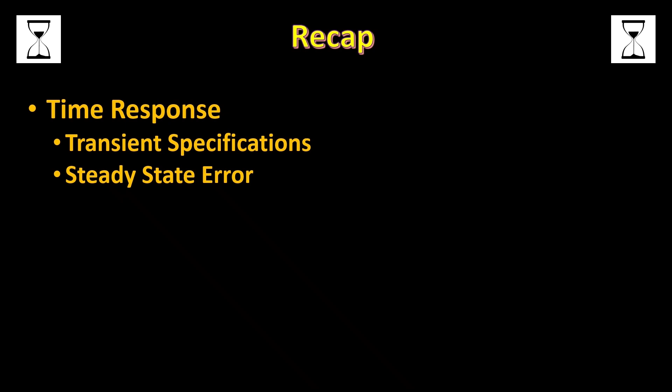I divide my PID controller lectures into three major parts. In part 1 and 2, I will cover the theory of the PID controller, whereas in part 3, I will solve some problems related to PID controller. Please recall, we have already studied time response analysis, so we know how to calculate transient specifications like maximum overshoot, settling time, rise time, etc. And we know how to calculate steady state error and what is the meaning of steady state error. So with this note, we will start.

So consider this figure first. I believe it is very much familiar to you. It is the block diagram of a closed loop control system where R(s) and C(s) are input and output signal in Laplace domain respectively. E(s) is denoting the error signal. It is obvious that the output C(s) depends on system and input R(s), right?

Now, in general, in industry, we cannot alter the system. That means G(s) and H(s) are fixed. So if we always try to bombard this system with the same input R(s), we will always get the same output C(s), right? But what if my output is not desirable? That means user wants something else. Okay, so is there any way to change our output or modify our output without changing the R(s) and the system? The answer is probably no.

But we can do a thing. We can employ a third party, or we can employ a system called controller, which basically we will try to put inside this system so that by using that controller we can change the output of the system. So our basic objective is to automate the control system. That means maintaining the output within desirable limits by selecting that particular control action. Now control action means that third party device, we need to fine tune it to get the desirable output.

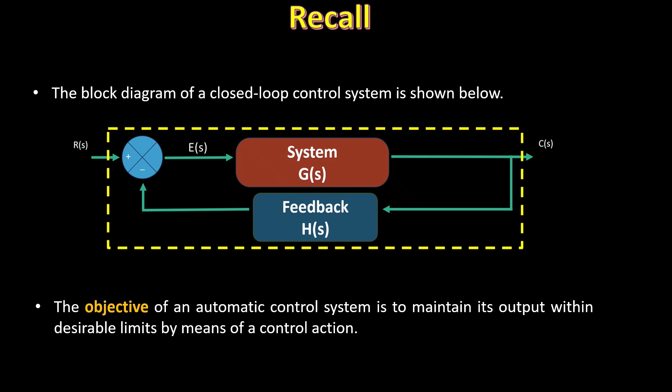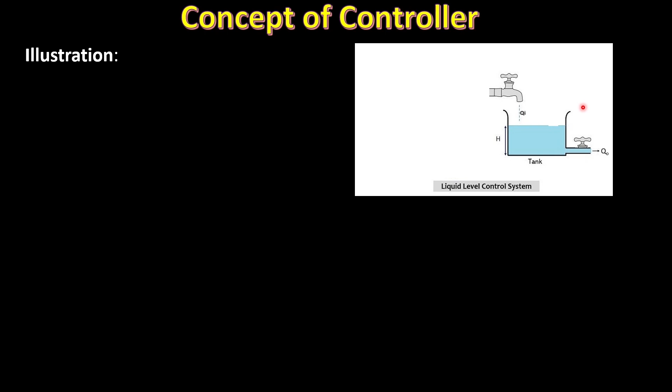Now try to grab the concept of controller using this simple illustration. This is a liquid level control system example. So here our objective is to maintain the water level at a particular height h. Now for that we have a tank and there are two taps. Tap number 1 is called inlet tap and tap number 2, let's say outlet tap. Okay. Now using these two taps we need to control the water level. So to make it automatic instead of manual, we must employ a closed loop like this one.

So here we first use a sensor, basically maybe an ultrasonic level sensor, and this ultrasonic level sensor detects the present water level and it sends this signal to a comparator, and the comparator then compares these two signals. One is the reference signal, that means the desired signal, with the actual signal, and then produces an error signal if any error is present. If there is no error present, that means the actual water level is at the reference level, then nothing to do. Controller will say, okay, keep idle.

Otherwise, if there is some error, either positive or negative, positive in the sense if the water level goes below the reference level, then you can term this as positive error, or if the water level is above the reference level, then you can say that it is a negative error. Okay, so once you get the positive error, controller will tell that, okay, I am getting positive error, so please turn on tap 1, so that water goes into the tank, and gradually the water level will reach the desired reference level, right?

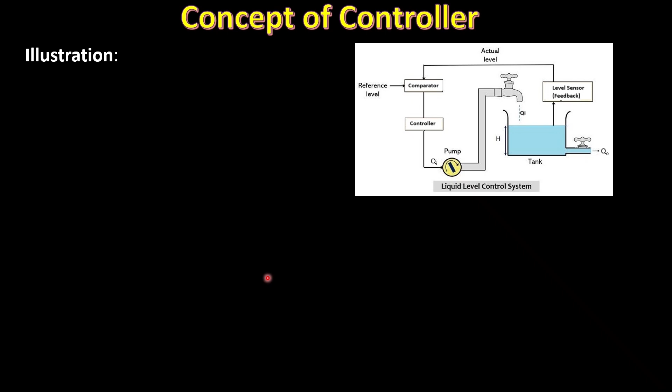And vice versa, if there is overflow, the tank is overflowing, so the controller will say, I am receiving negative error over here, so please switch on the outlet tap and switch off the pump. Okay, so in this way the water level system actually works. So our basic objective here is to minimize the error by employing an automatic controller.

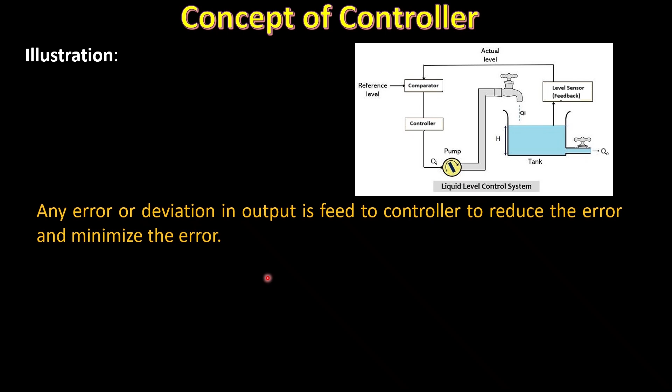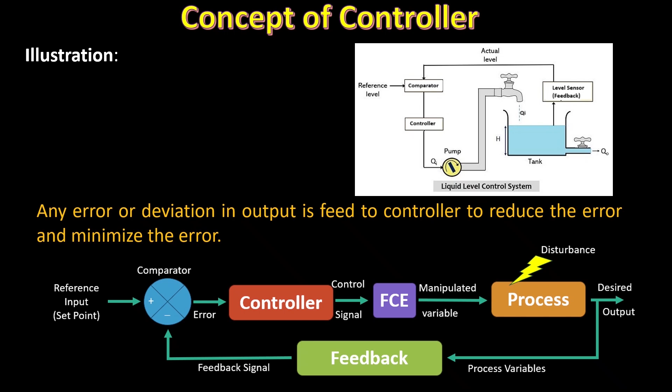Now, there are different controllers available in the market. The major controllers are on-off controller, PID, fuzzy, adaptive, robust, and model predictive controllers. This is not an exhaustive list, of course, but these are the major controllers available. Now, in your syllabus, we will talk about only on-off controller and PID controllers.

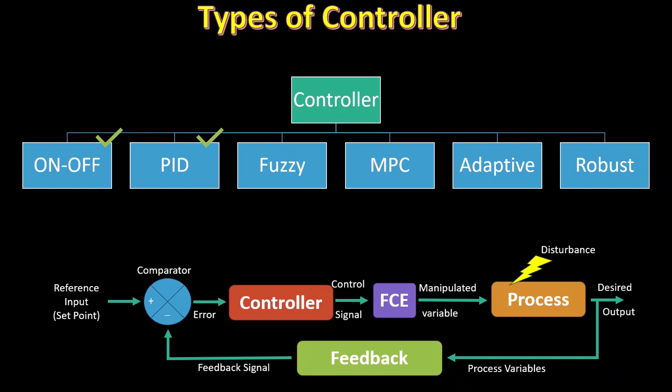Okay, so for understanding the on-off controller, again consider the previous example of the liquid level control system. Here you must know that there is one constraint. The constraint is that tap 1 and tap 2 operate in either 100% on or 100% off mode. That means there are no in-between points; it is not possible to turn on tap 1 by 50% or by 25%. Either the tap is fully open or it is fully closed. So this kind of control action is called on-off control.

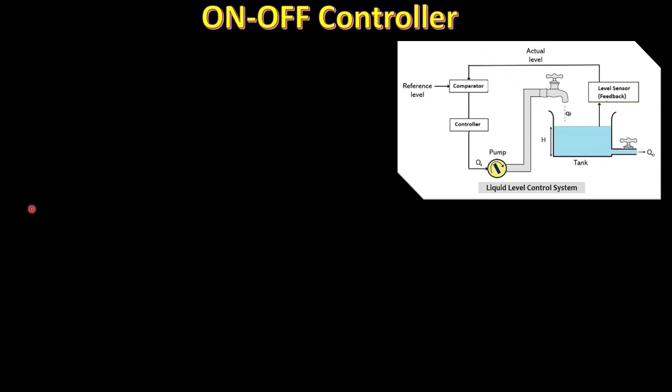So that means depending on the error, the actuator will be either 1 or 0. Okay, that means on or off. This can be mathematically represented like this. So the actuator signal is either 1 or 0 depending on the error, whether it is greater than the set point or less than the set point. If it crosses the set point, let's say error is positive, that means the water level goes below. If it is greater than set point, that means please turn on this tap. And if it is below the set point, then 0 means turn off this tap. Okay, so this kind of equation will help us to understand.

Now, this equation can also be realized in the Laplace domain like this one, where A(t) becomes A(s), and this is basically the error signal E(s). But if you think minutely, you will definitely understand that it is not possible to settle the water level exactly at the same reference level. Why? Because of some transportation lag and the actuator function.

What I want to say, please try to understand. Suppose this red line is my desired water level in the tank. Okay. So now, is it possible to stop the water level exactly at that point? Probably not. You can see this diagram. When the liquid level rises, the error decreases, and when it touches the set point or reference point, it will take some milliseconds to give the controller signal to switch off the pump now, or cut off Qi, I mean the inlet tap. But within these 2 milliseconds or so, or due to some inertia, some amount of water is again pouring into the tank, which will eventually cause some accumulation of water, which causes this kind of overshoot.

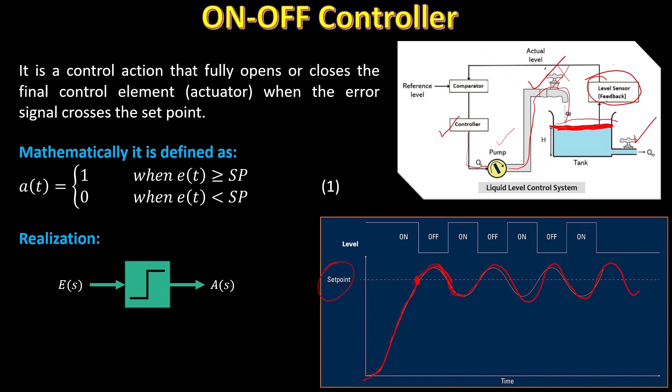Due to transportation lag, some amount of error we will be getting constantly, right? So this is a very important concept. So for the on-off controller, although the construction is very simple and it is a stable solution, the con is the output is oscillatory, and due to this oscillatory output, we never get the error equal to 0. We will get error tends to 0, but not always exactly 0.

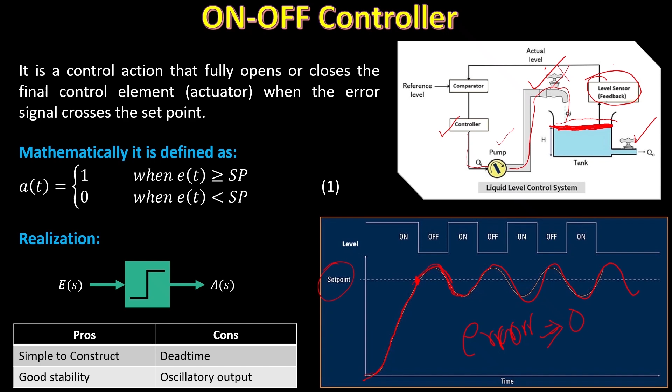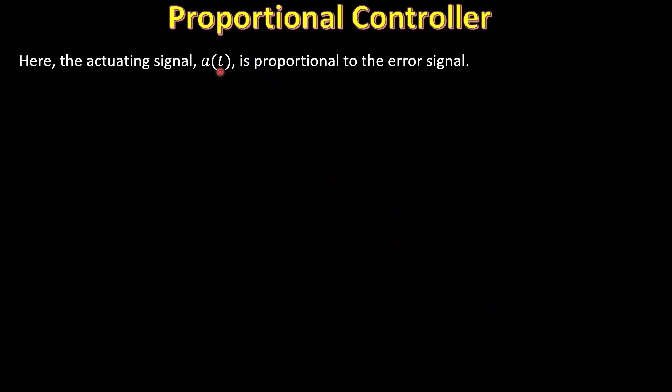To overcome that oscillatory nature of the output, we can use this proportional controller instead of the on-off controller. What is a proportional controller? In case of a proportional controller, the actuating signal a(t) is now directly proportional to the error signal. So mathematically, we can write it like this one. Okay, so please understand the difference. In case of the on-off controller, a(t) must be equal to either 1 or 0, fully on or fully off.

But here, depending on the error nature, we can turn on the tap not fully; maybe slightly on is also possible here. That means if the error is, let's say, very less, your tap should be on, let's say 5%. If the error is very high, that means a huge gap between the reference level and the actual level, your actuator signal will behave like 1, that means 100% on. Okay, so this is the meaning of this proportional controller.

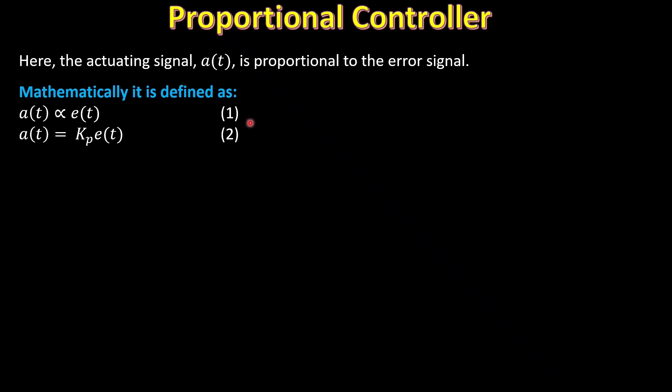So from equation number 1, we can easily get equation number 2 by introducing a proportional constant. Now, once we get this proportional controller, we can take the Laplace transformation and write down equation number 3. This equation number 3 can be realized very easily like this one, where E(s) is multiplied with Kp, and then it will give you the output signal, the actuating signal A(s).

Okay. Now, in our class, we have seen that if I give a step input like this one, a unit step input 1, and if I take a normal system like 1/(s+2) or 1/(s+1), and just see the output response, then it looks like this one. Since it is a first order system I am talking about, 1/(s+2), let's say, this will be the output. Right. Now the output value is 0.5.

How to increase this 0.5 output? Because I don't want 0.5 output. I want nearly about 1. So for that, if we increase the value of Kp, we can see a drastic improvement in this final value. That means it is trying to reach the 1 value. Okay. So if we use Kp equal to 1, then this blue line will occur.

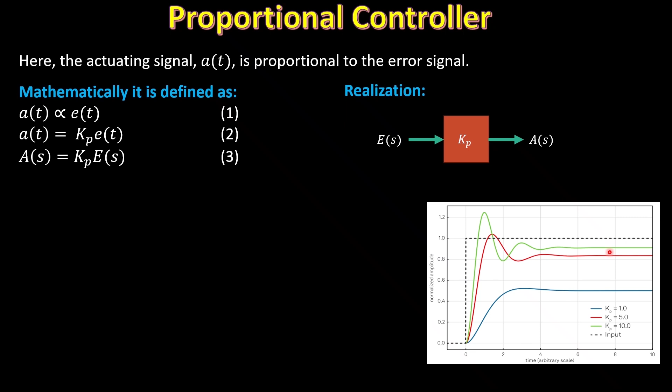But if we increase Kp to 5, then some oscillations are there. That means it acts like a second order system. Okay, but ultimately the error is also very minimized. Here the error is very high, but in case of the red one, the error is minimized. Similarly, if you increase Kp further to 10, then more oscillations occur, but the error is also less. So you need to smartly choose the value of Kp so that the error and oscillations can be managed simultaneously.

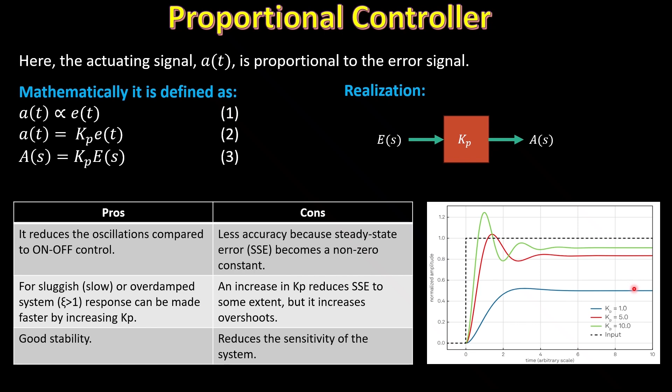Okay. Now let us look at these pros and cons. In case of the proportional controller, the pro is it reduces the oscillations, because as you can see at the steady state, there are not any oscillations observed, right? Similarly, it has good stability, whereas there are certain cons also. The con is if you set Kp to a very high value, then oscillations occur. That is a disturbing point. Similarly, it reduces the error, of course, but it does not reduce the error exactly to zero. But sometimes we need the steady state error to be exactly zero, which is not possible with a proportional controller.